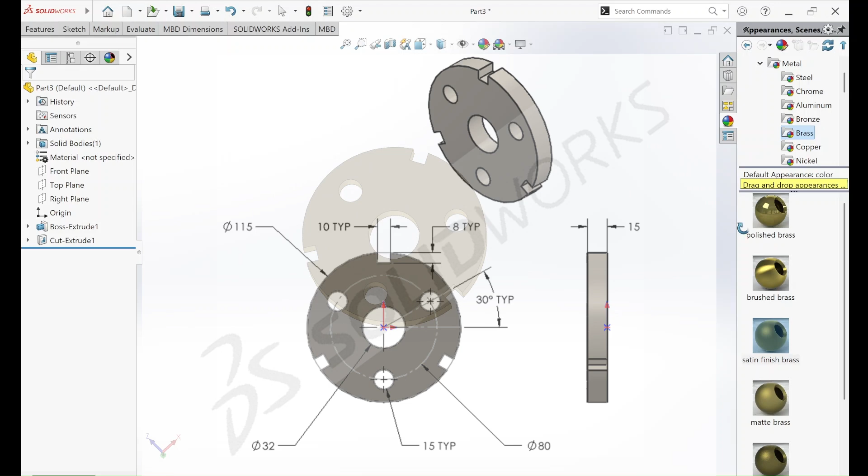So let's go with the parts. Then sketch, then top plane and sketch, and we will first draw 3 circles.

So first 2 circles, and the third circle in the middle to make that reference. So we will just go for constructions and this will make a reference.

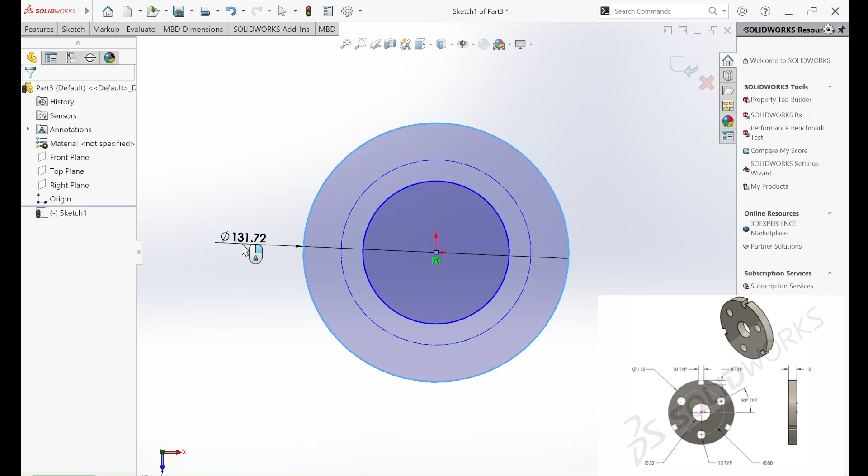Let's go, let's give the dimensions: 115, 80, and 32.

So let's go, now this part is done. We need to draw these 3 circles, small circles.

What we will do is make a center line. Then select one more center line, or the center line. What we will do is make them 30 degrees apart.

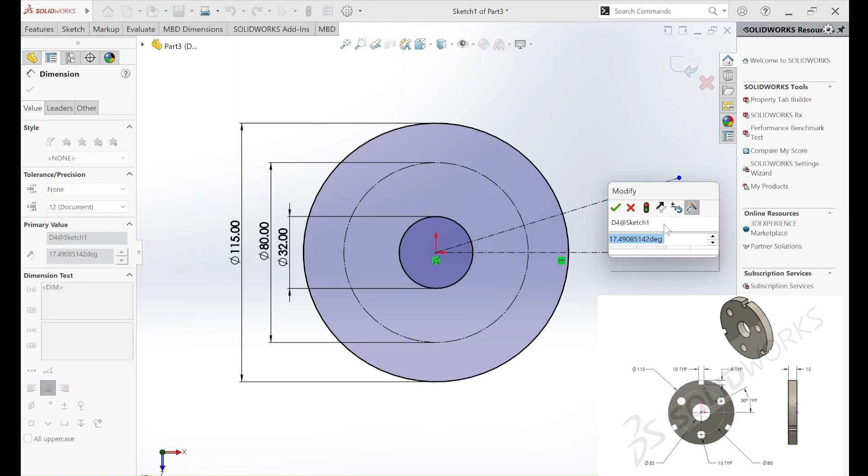So let's go, as you can see in the sketch also. Now we will just add a circle at the midpoint of circle and the line.

Okay, let's give it dimension 15, and now this part is done.

So now as this is done, what we will do is go to circular sketch pattern, select the circle, and drop it down to 3. Okay, now this is done.

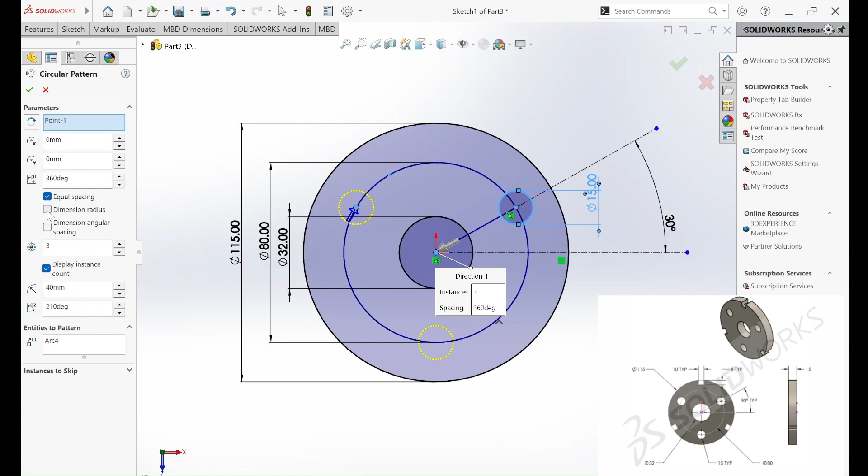Everything is looking perfect now. Radius, okay. Now this is done.

So what we will do is go to features, extrude. I extruded it to 15, as you can see, it is 15 now.

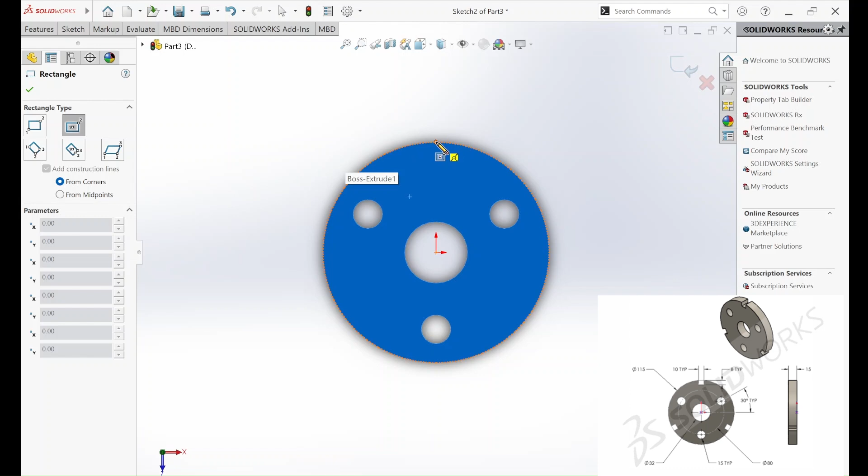So let's go. As this is done, you just select the plane, then go to sketch. Now we will make that slot, all the 3 slots. So for that we will do a center rectangle. Let's go, select it, make the center rectangle. Now we just need to define it.

This line is 10, and here it is 8, as you can see in the sketch also. So let's go, this is done.

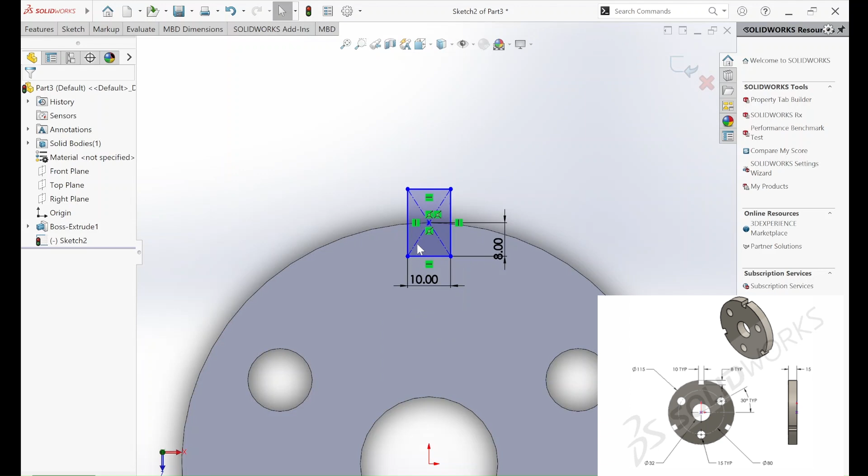So now what we will do is we need to define it more, as you can see it is not fully defined as all the lines are blue. So let's go, we will just go to sketch, add a center line, and just draw it. Okay, now as you can see it has turned black, meaning it has been fully defined.

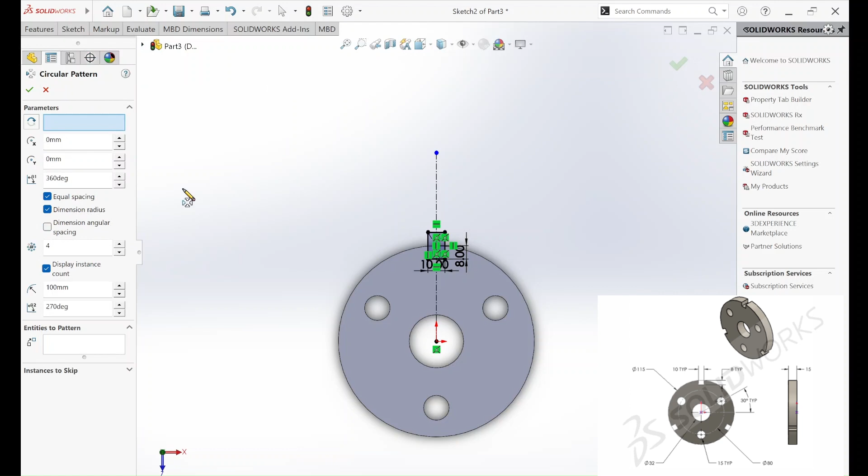Now go to sketch, now go to circular pattern again, and then select this rectangle. Now do it for 3, and done.

Let's go to extrude cut and through all. Okay, now our base is ready.

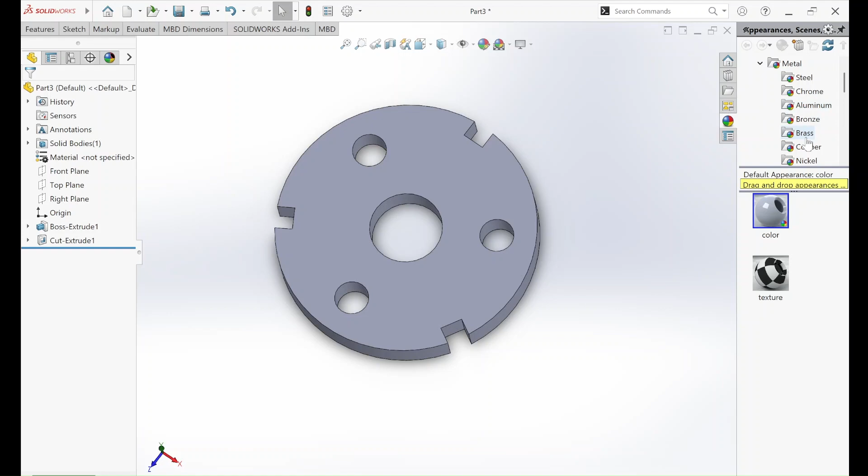Now we just need to add the colors. So for that, what we'll be choosing is brass. So let's go in the metal section, go to brass, select the brass color. Okay, now this is done.